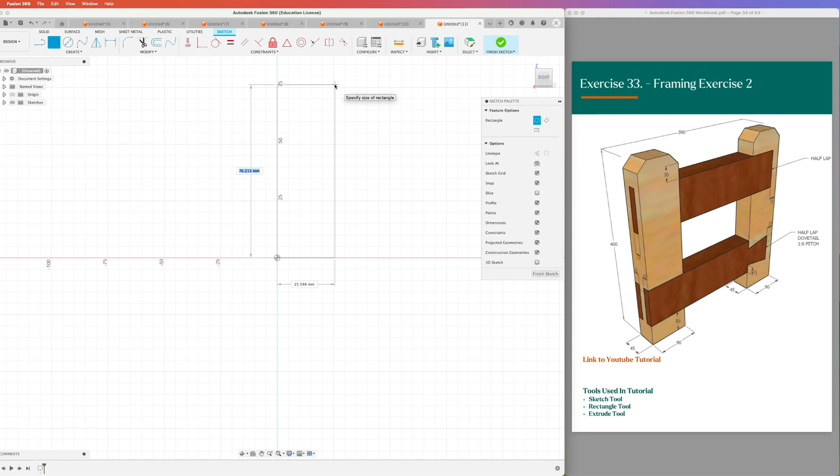So if I go into my sketch, I'm going to jump into here. I'm going to draw that first lighter piece of wood. So it's 400 by 90. Let's just extrude him out. So he needs to come out 45. And then we're going to use the chamfer tool to cut off the corners. So modify, chamfer, those two there.

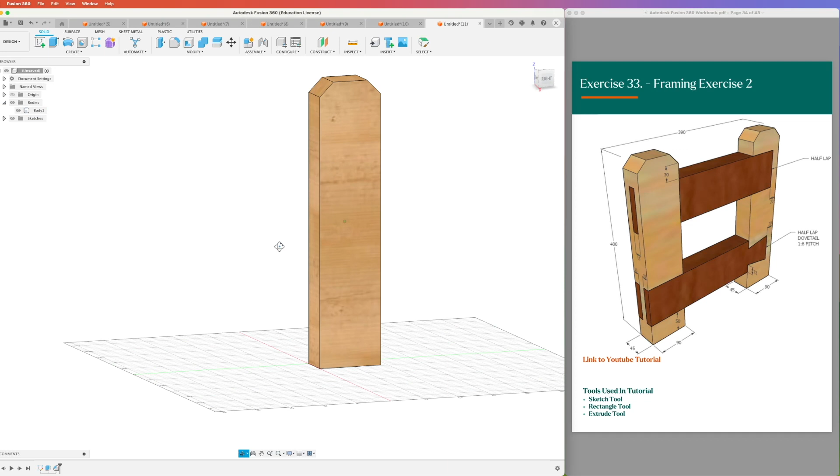Now we don't have a distance. So let's make him 30. Looks a little bit big. We might go with 20. That looks about right. So there's our first piece done and dusted. Now what I'm going to do is I'm going to leave him like that for now. And I'm going to go and draw my other two dark pieces.

So what I might do is draw this top dark piece now. So I'm going to create the sketch of this front face. I'm going to draw it just next door, so it doesn't have to be touching it. And so it's going to be a height of 90. And it's going to be a length of 370. So just be careful. It doesn't go all the way to the end here, so it's 20 mil short. So it's 390 minus 20.

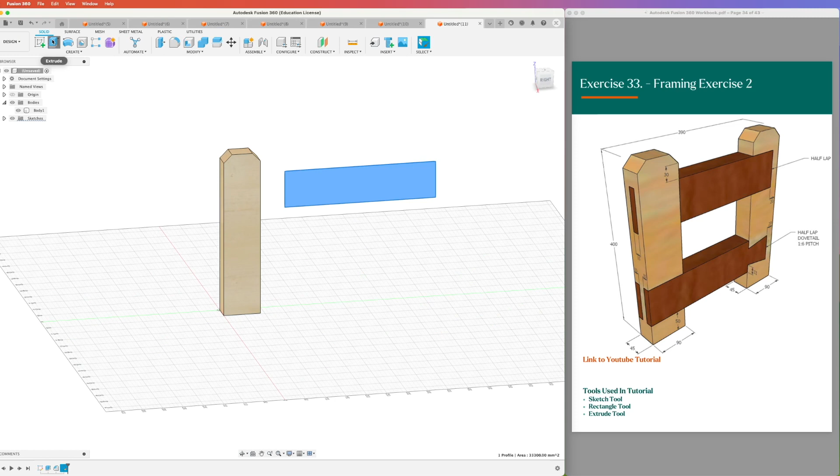And then extrude that out. And it's going to be 45 millimeters thick, sorry. And we're going to sketch off our top side because that will allow us to be able to take out our bridle, which is 15 by 90. And the same here, so 90 by 15. And we can take out our half lap at the same time. So this half lap is going to be 45 divided by 2. And it's going to be 70 long on this end.

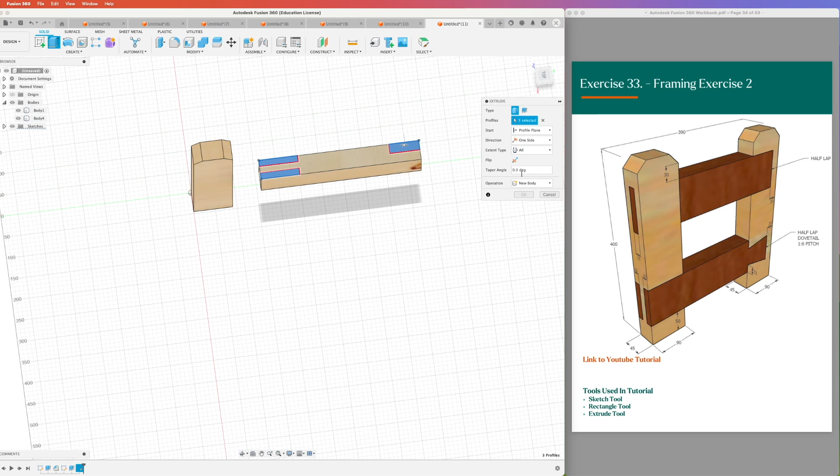So we can finish that sketch. We can extrude those 3 rectangles out. I'm going to go through all and flip it around and cut it. I'm going to click OK. So there is my second piece done. And so we need to just sketch out our third piece here. So this one might take us a few more steps, but it's going to be 90 by 370.

I can then come through and sketch out my dovetail on this end. So I don't have dimensions for my dovetail. I've just got a pitch of 1 to 6. So we're just going to draw it out like so. And we should be getting pretty close if we start dimensioning what we have. So we have a dimension for this one of 22. And same with this one will be 22. And then we know that from here to here has to be 70.

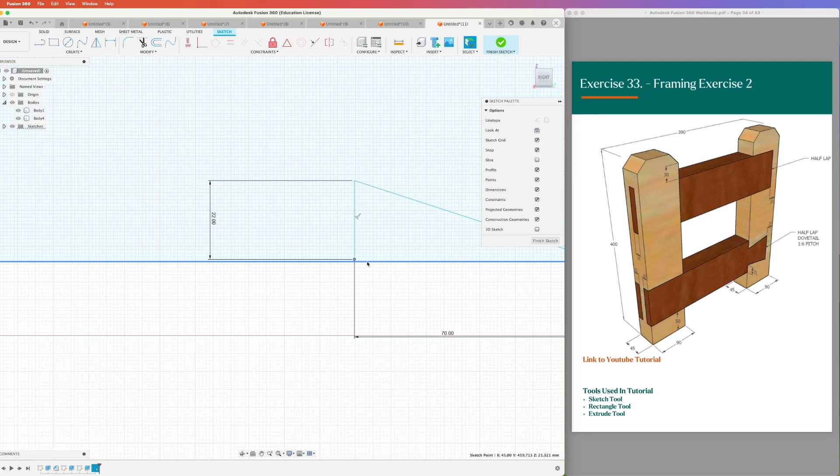Now you can see that my line isn't quite in the right spot there. So we just need to grab our line. We're going to coincident. So we're going to say that this line has to touch this line here. So this corner has to be on that line there. So coincident. And now they have to touch, so they are touching. So he should be in the right place now. And there's our shape drawn out.

So we can extrude him out, going at 45. And that is now done. And so what we need to do is we need to cut out our bridle joint out of the end here. So we're going to flip him up on our sketch. And while we're here, I'm just going to turn off body 4 so he's not in our way.

So we need a rectangle, and he needs to be 15 by 90, and he needs to be 15 in from this edge. We can then come and cut out our half lap on our dovetail as well, which should be there. So if I come down to here, you can see right there is the middle.

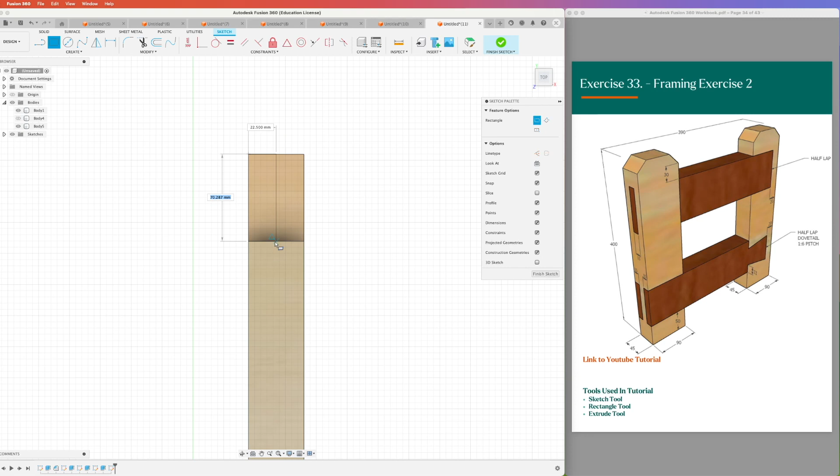And so that's done. Nice and quick, that one. And if we extrude him and him back through, I can go all the way through. He's cutting away. And so there's my third piece. So let's just turn on body 4 before we forget about him.

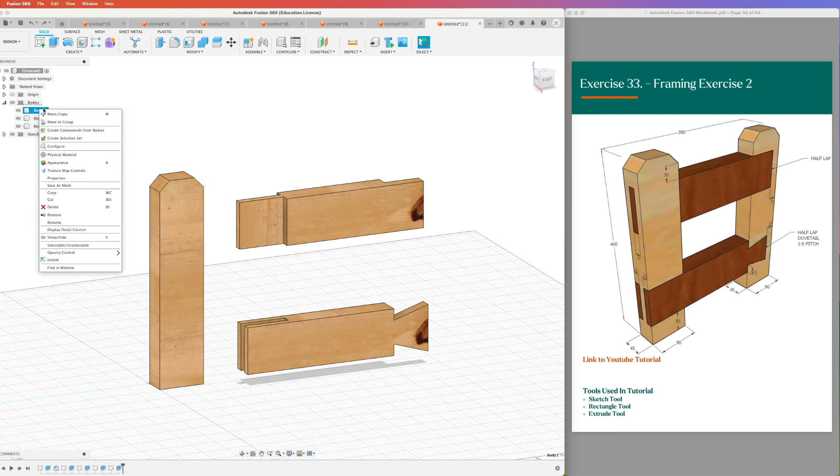Okay, so what I'm going to do here is I'm going to duplicate my body 1 and then we're going to assemble it. So I'm going to go move or copy. I'm going to come down, I'm going to click create copy. So just be aware I'm on free move here. I'm just going to move him all the way across to that side because that's where we'll want him to be eventually. So now I have my 4 pieces and I want to assemble these together.

So number one, we always need to make sure we have our components. So I'm going to right click, create component, create component, create component, and create component. And then these move around, so I need to ground one of them. So I'm going to grab the first one here. I'm going to right click and click ground. And I'm always going to click revert position, which just puts it back to where it was before I moved it. And now he's stuck.

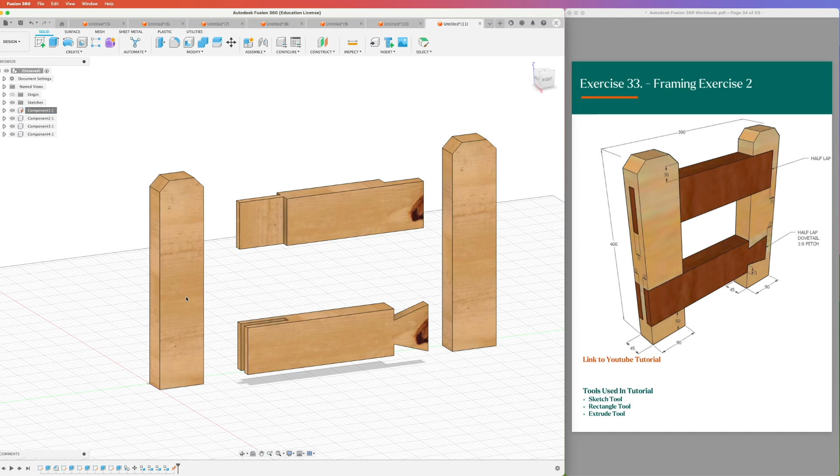So this one here is component 2. I'm going to right click and go appearance. I'm going to grab my walnut, drag it on. I'm going to drag it onto this one as well. So now we have our darker colors and we just need to assemble these back together. So we've got our joint and we need to think about what we want to join and where we want to join it. So in this case, I'm actually going to pick this top corner.

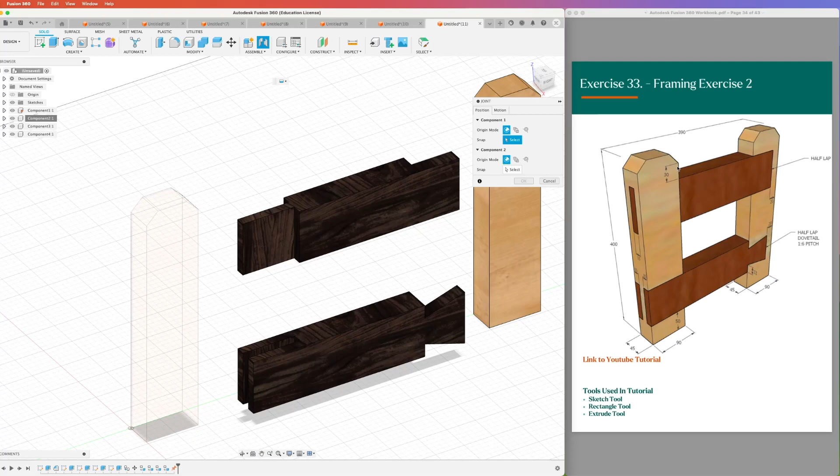Now, why am I going to pick that top corner? Because if we look over here, I can choose the top corner here with the top corner here and then offset at a distance. So if I choose this top corner with blue facing up and this top corner with blue facing up, it'll slide in. Then I can drag it down a minus 30 millimeters.

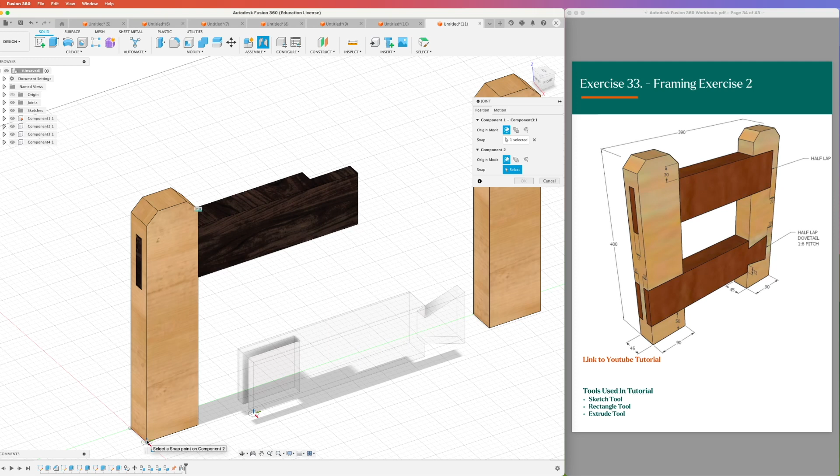And so I can do the same down here with my bottom one. I'm going to choose the bottom left corner this time with green facing up and red facing me. And he slots in there. And then we need to drag him up 30 millimeters. So there's those two assembled.

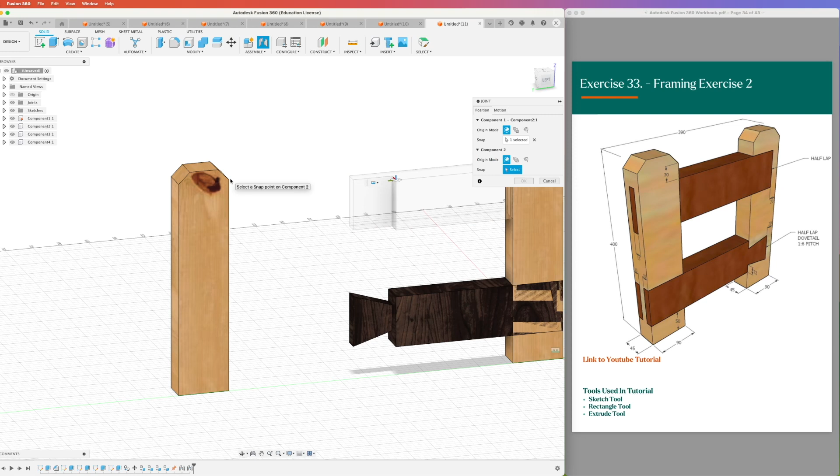Now, how are we going to do these ones over here? We just need to think about it in a similar way. So I could grab the top corner here and the top corner here, and he'll move in, but we then need to offset him down the 30 millimeters. Click OK, and everything will move back to where it was. And so now we're fully assembled.

We just need to go and use our combine tool. So target body is this one, using that one. And in fact, on this last one, what I'm actually going to do is we can select multiple. So we can go target this with this and this. And there we have it. So we should be finished now.

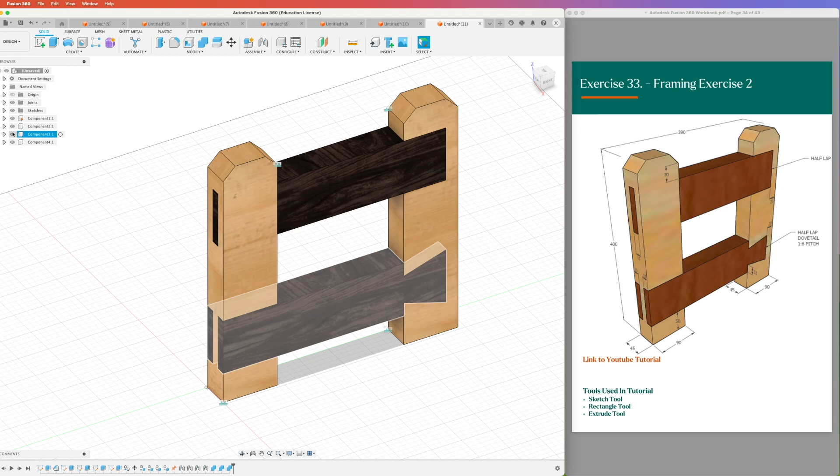If we wanted to double check, I can go and start turning off my components. And that is what our joinery would need to look like in our other pieces. So if we wanted to make this joint exercise, we'd have to cut out all of those pieces. And our other pieces would look like so. And that's exercise number 33 completed.